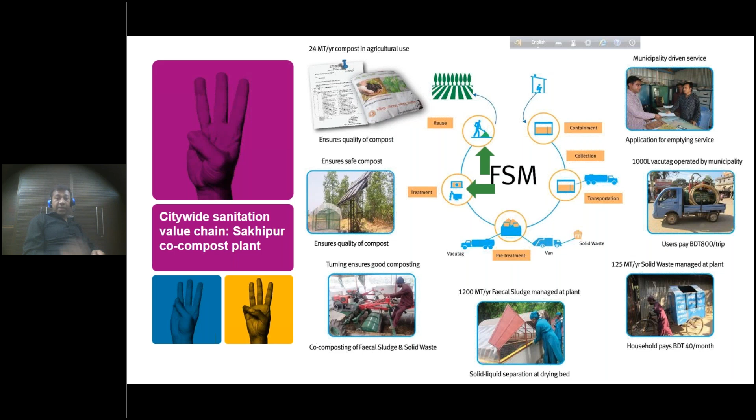But today's presentation is not that story. Today's presentation is how it has impacted this journey. And in order to state that, I would like to start from the planning phase. So in this presentation, you will find some red, green, and amber circular stamps throughout. Just to save time, I am giving a bit of explanation. Red means very difficult, almost impossible, or strong blockages. Green means we achieved that. Amber means difficulties, but we need to push ourselves a bit more to reach the green.

So that SFD actually helped us during the initiative we took at the planning phase, initially as an icebreaker. When we break the ice, that's the important part. Otherwise, we cannot go into the deeper options.

Later on, while the discussion went on, and this is an advocacy tool, it helped us also to identify the hotspots where we need to put our interventions, the right decisions by the municipality. In order to do that, as I mentioned, the toilet types of this municipality and accessible routes are the ingredients to identify the proper action plan for emptying.

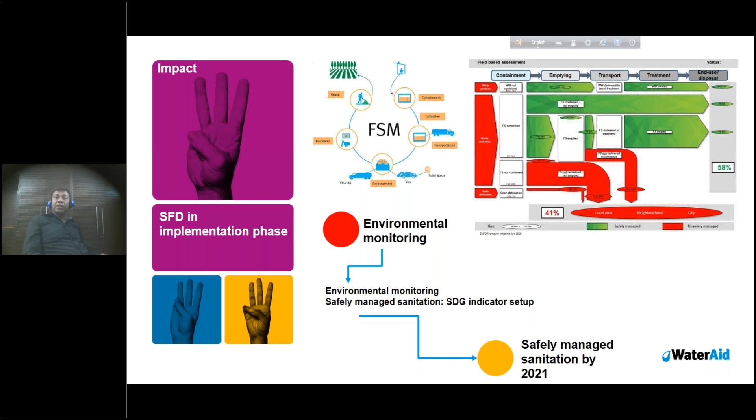The other part is definitely environmental monitoring. We all are striving for safely managed sanitation, and if it continues like that, Sakhipur municipality has a vision and dream to declare that it will reach safely managed sanitation by 2021. I promise that it will be the first declared municipality in Bangladesh to achieve safely managed sanitation status across all the municipalities of Bangladesh.

It has also pushed us toward context-specific innovation: made in Sakhipur, made for Sakhipur. The municipality took all the decisions to have this system made here, with the knowledge, technology, everything.

The operation and maintenance will be their part, and it is easier to do them, and it also enhances their ownership and responsibility, and we are proud of that. This is for Bangladesh and made in Sakhipur and made for Sakhipur. A model to replicate what WaterAid and other development organizations are always striving for, because sustainability is an issue.

Once we have this picture, from 2015 to 2018, throughout this FSM journey, we have got an advocacy model for replicating it in other cities. And as an impact of that, we started in 2015 in Sakhipur, the bottom SFD, and the topmost one is in the Saidpur municipality, which we very recently started, and we will follow exactly the citywide FSM initiative, and SFD is definitely an important part of that.

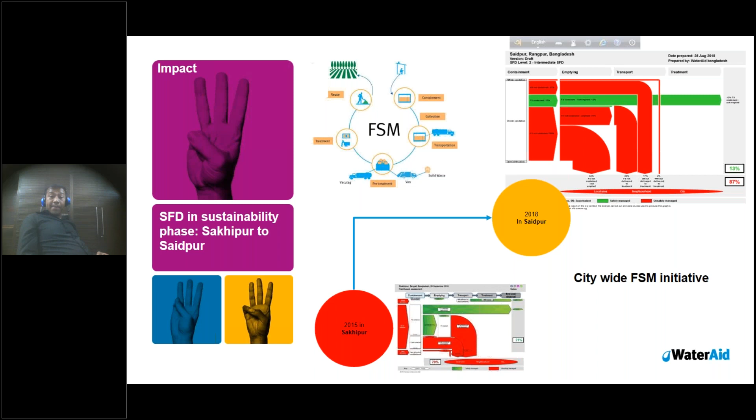And still, I put it as amber because it is an initiative that has just been taken, and the construction is going on. Hopefully, it will give us a very good example in the coming future. I cannot resist mentioning how it has influenced others to become champions, not only WaterAid but also others, because we cannot work everywhere. So in order to do that, we need to bring up championship by other organizations, other institutions, even the local government.

In order to do that, we also developed shit flow diagrams of Narsingdi municipality and Netrokona City Corporation. The green one, why is it Narsingdi municipality? Because the municipality has already taken the initiative to strengthen their FSM plan to make it an active, operationalized one. That's why it is green already. You see how it has influenced. Netrokona is still red, Sylhet is still red, in Sirajganj Practical Action is taking the initiative, that's why it is in amber.

Rajshahi is still red. In Gazipur, not only the municipality but other sector actors are taking initiative on FSM in this city corporation. Just to mention that Gazipur City Corporation is the largest city corporation in Bangladesh, so it is a very big one, and it has to be taken in an integrated way, after ensuring that all stakeholders are involved before taking a very big decision. In Mymensingh City Corporation, another NGO has already taken initiative; that's why it is green. NGO Forum has taken the initiative.

Kumilla is still amber. We hope to enter there, and another one is the Narayanganj City Corporation. It is also a big one, that's why it has to be an integrated one. But the point here is, we do this advocacy to make some national champions, right? At both local and national level, and these are the influencing tools to move it from amber to light green to greener to finally the ultimate target, green. The FSM story has just begun, and thank you very much for your kind attention.

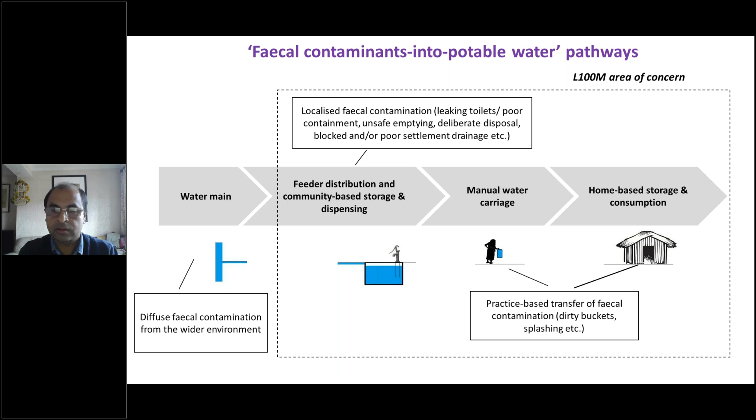So what we are proposing here is three hypotheses. One is that by expanding the water safety practices beyond the household domain, we can modestly improve the safety of water. At the heart of this hypothesis is that there are two types of safety plan being promoted: the water safety plan and the sanitation safety plan. This first hypothesis is saying that our intention to provide only water to the low-income settlements is not going to produce a very sustainable solution.

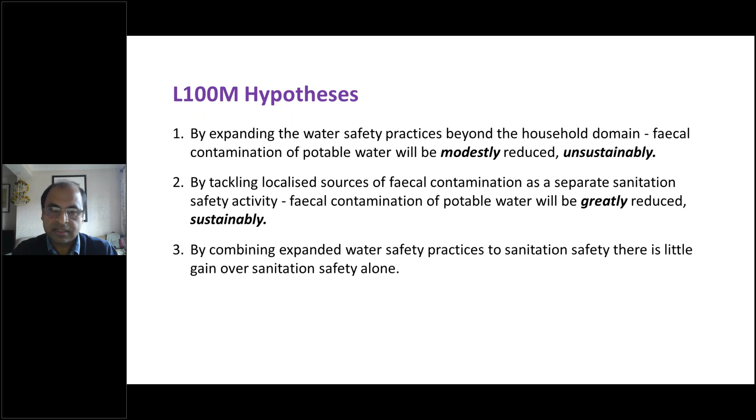Now, we went to design an experimental study to prove this hypothesis. This is where the last 100 meters design comes in. We are identifying 4 distinct platforms to do this. One is the experimental design. Second is characterization, which will involve social survey, mapping, surveys, interviews, structured observation, a lot of different things. The third strand is the action research, where we deliberately pay for the water safety plan and sanitation safety plan, and we do a process documentation. Finally, we also

Vitus, can you see my screen? Yeah, we can hear you. Go on. Okay, but why that I got a message saying that.

Okay, so sorry, the final one is the environmental observation. So then we selected 4 low-income settlements in two cities: one is Dhaka, Bangladesh, and another one is Dar es Salaam, Tanzania. One of our settlements is the control. The second one is only intervention 1, that is the water safety plan. The third is where we are doing only the sanitation safety plan, and the fourth combines both sanitation and water safety plans. So site 1 is control, site 2 is WSP, site 3 is SSP, and site 4 is combined, and that is happening in 2 cities.

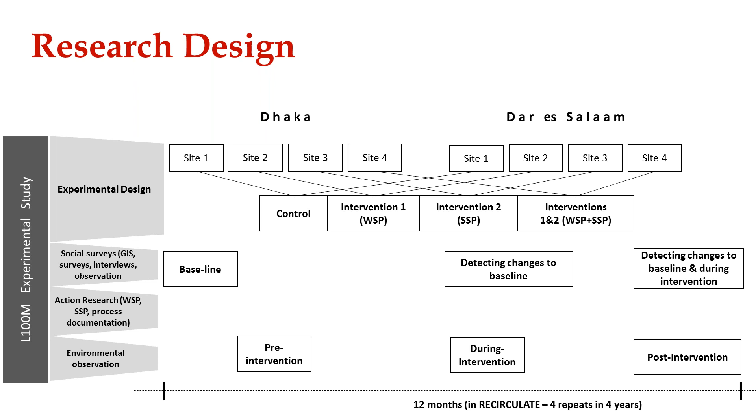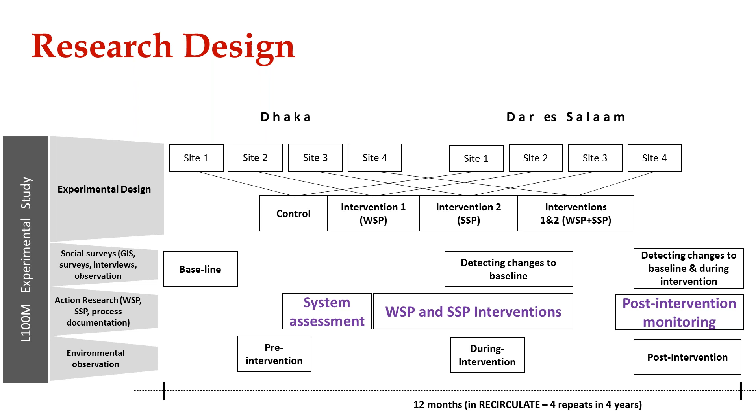So the whole experiment is about 12 months. As you can see, the social survey will do a baseline, then detect changes to the baseline and post-intervention. Environmental observation, again, will be pre-intervention, during intervention, and post. The important bit for this discussion is the sanitation action research: the system assessment, the intervention and post-intervention. Where we are positioning the SFD here is that we are doing pre-intervention SFDs and post-intervention SFDs, to see whether the intervention produces any detectable change in SFD estimation for these sites, and also whether the post-intervention improvement we might see is really linked to the environmental improvement.

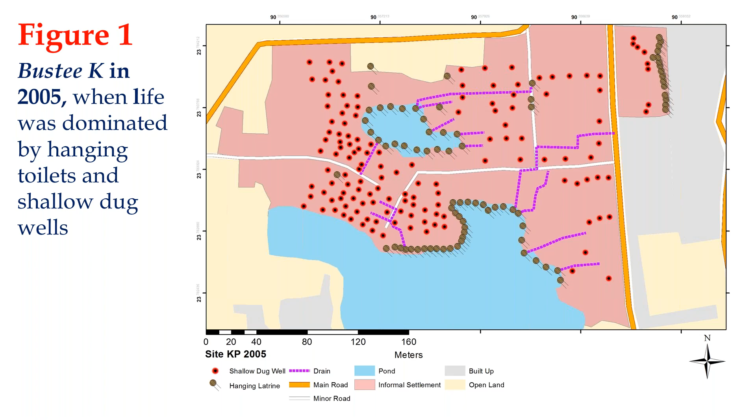So you can see that there are 2 water bodies, and life in Bustee K was very bad in 2005. Okay. Now something changed in Bangladesh. Bangladesh has these possibilities of really getting civil society advocacy and influencing policy. So in 2007, we had quite a massive change in the policy. Before that, government did not really allow water and these sort of utilities to come to low-income settlements. But in 2007, they said that if civil society organizations can mobilize low-income people and act as an intermediary, then water and sanitation can be brought to these settlements.

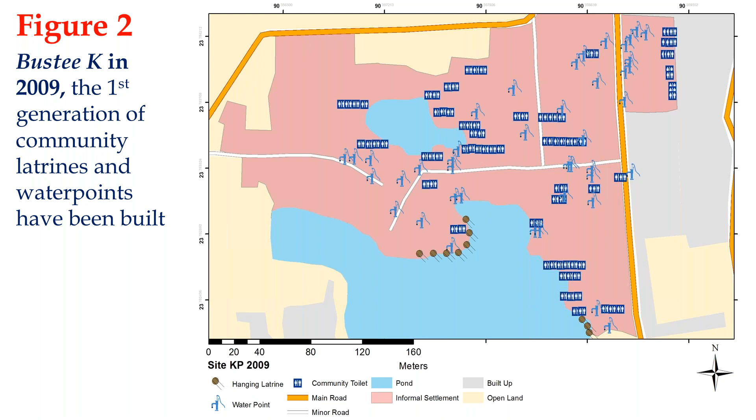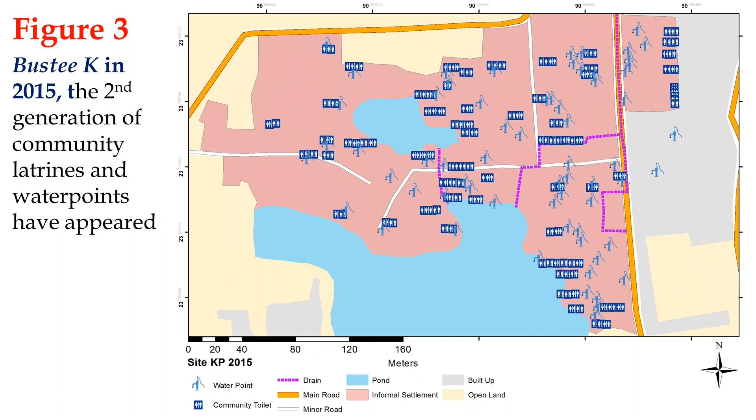So suddenly you see that by 2009, all these hanging latrines almost disappeared, and the shallow dug wells also disappeared, replaced by hand pumps on the water reservoir and the public toilets, community toilets. And by 2015, this has much improved. So one could probably assume that life has gone better in this settlement. But our study is showing that that probably is not the case.

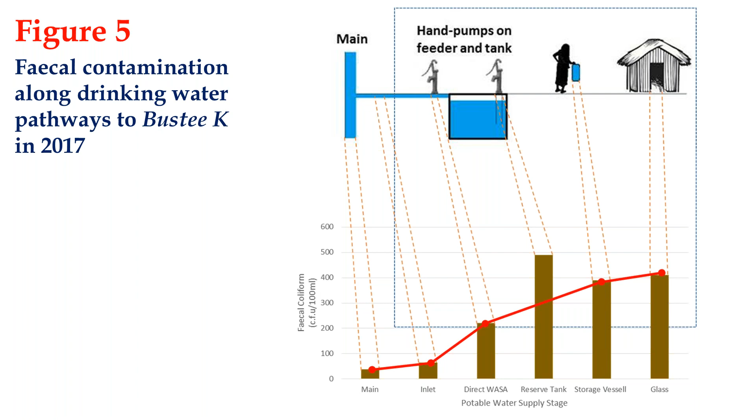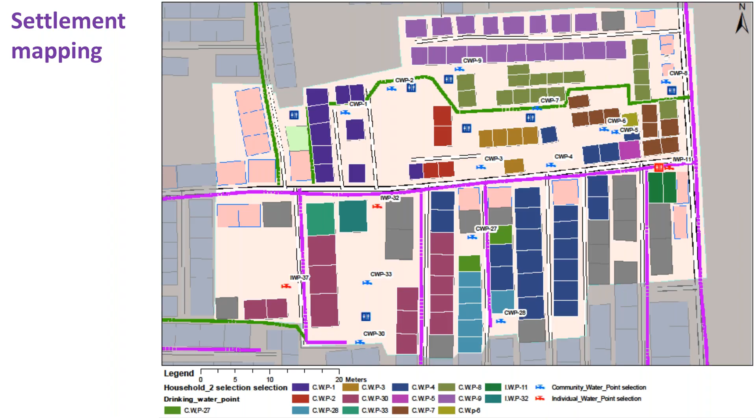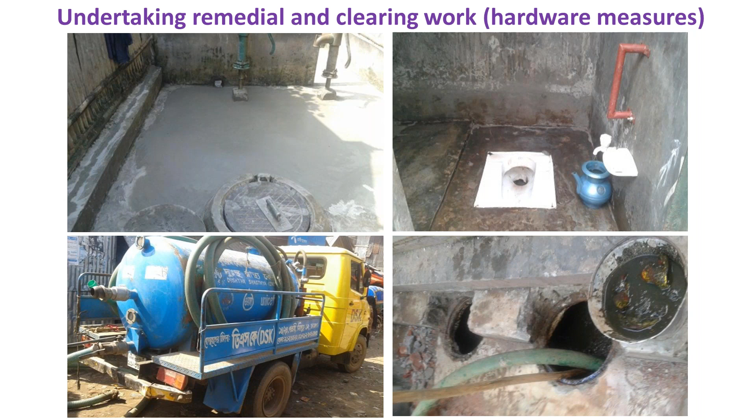So that's where I would like to stop. We hope to be able to share our results about the SFDs, linked with our outcome in terms of whether we have been able to reduce the water contamination in the last 100 meters, by early next year. So thank you very much.

Then the approach the team has taken to achieve the project's aims: we have introduced the project to the water, wastewater and sanitation sector through what we call master classes. The sector includes municipalities responsible for sanitation provision, the regulatory body, which is the Department of Water and Sanitation, and other supporting departments. All these sector partners were invited to the master classes.

The master classes were held in 2 of the 3 regions we are targeting. At this stage, we have conducted 2 master classes. At the master classes, the benefits of developing SFDs were presented to the sector. CSE was part of this exercise. They assisted the team in sensitizing the sector at the master classes.

After that, data for targeted or selected municipalities was collected through their institutional public documents. We conducted interviews with the municipalities. We conducted site visits where applicable. And the municipalities were allowed to decide on the SFD boundary.

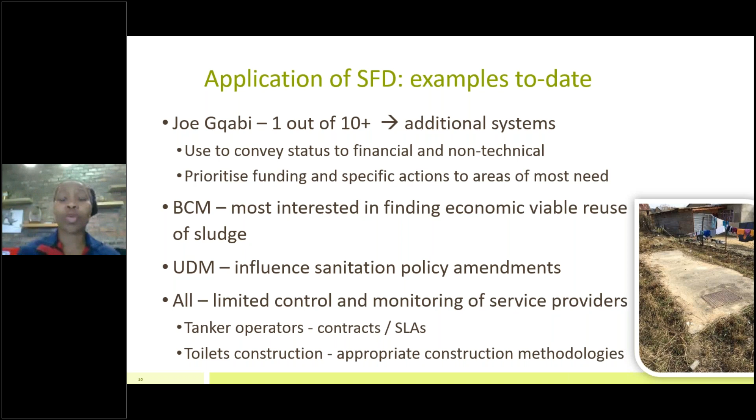The next steps: we are at a stage where we are busy drafting the SFD reports for the municipalities that have participated. Then we are going to send those draft reports to municipalities for comments. From the inputs we receive, we finalize the report. After that, we send those reports to CSE for review, and then the SFDs would be finalized and they can apply their findings. Then we are going to develop more SFDs. As I indicated, we're targeting about 30. Then we're going to analyze the data and develop a status report, which should help guide the way forward and hopefully lead towards the Brown Drop.

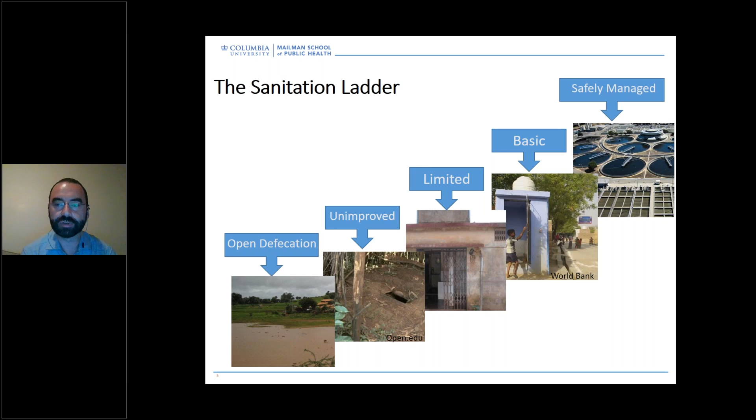But just briefly emphasize that inequity in sanitation systems is also expressed through access in addition to exposure. And that's something that's already tracked quite a bit, that I think people are more familiar with. You know, there's this discrepancy between access in urban areas and rural areas, as well as there's inequity between large and small cities, just as examples.

But what we're trying to do is also look at equity in terms of exposure. So not just looking at who has access to what, but also how much wastewater and septage is not treated, and then where does it go? It goes into the environment, but the environment is not just this faceless, nameless entity. The environment oftentimes is other residents of the same city or other cities. And so when that happens, then that becomes an issue for inequity.

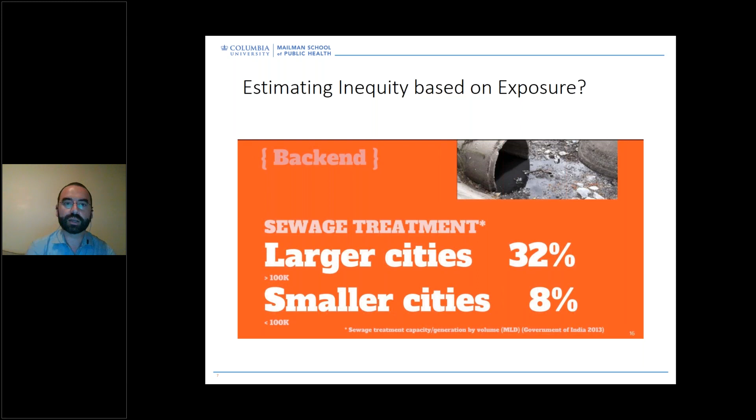Specific sources of inequity, or specific points of exposure that we have identified that we are now trying to track and quantify in terms of the types of people and the number of people that are exposed in these ways include groundwater contamination, piped water contamination, direct contact with open drains, flooding, lack of protections for sanitation workers, as well as for farm workers that are engaged in reuse.

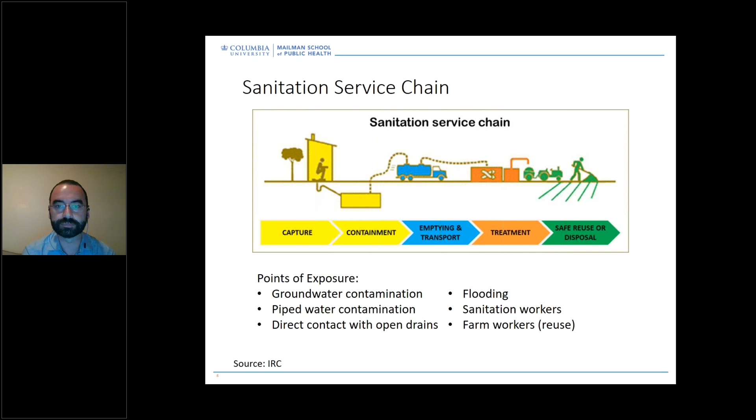The goal of this project is to highlight social inequities, economic externalities, and issues of environmental justice in sanitation system upgrades. And we're doing that through creating a modified SFD. This is just an example. It's not based on actual data. We're still in the process of collecting data, as I've said. But this is to give you an idea of visually what we are thinking that we will eventually try to do.

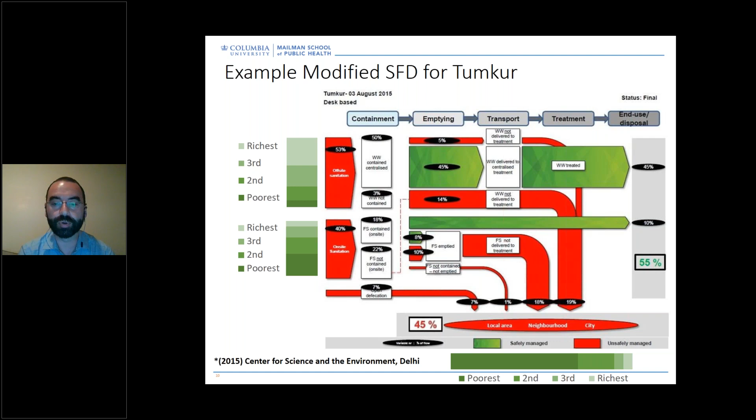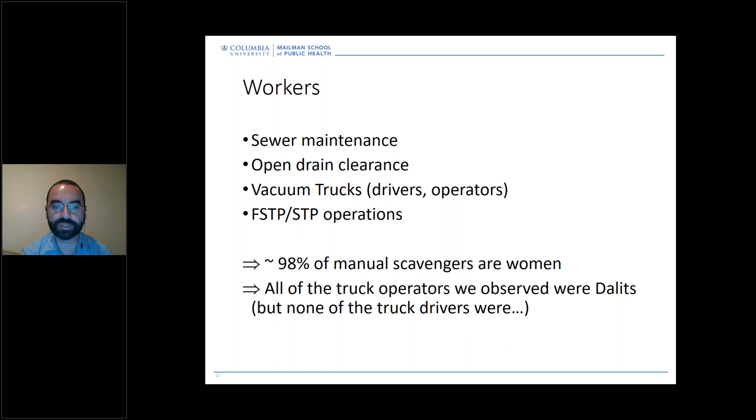In addition, in our data collection, we're also looking at gender inequities in the sanitation system, which we found largely to be outside of the home. So we're tracking access in the workplace and schools as well as when traveling. And we're also collecting data on sanitation workers and whether or not they have proper training and protective gear. The goal of this project is to try to track inequities in the sanitation system.

In this example, hopefully people can see these pipes which are hanging suspended over this drainage canal. The drainage canal is also filled with solid waste. And as you can imagine, during the monsoon season, more solid waste comes, more water also comes, and the drain fills to the point where it puts these drinking water pipes at risk of contamination.